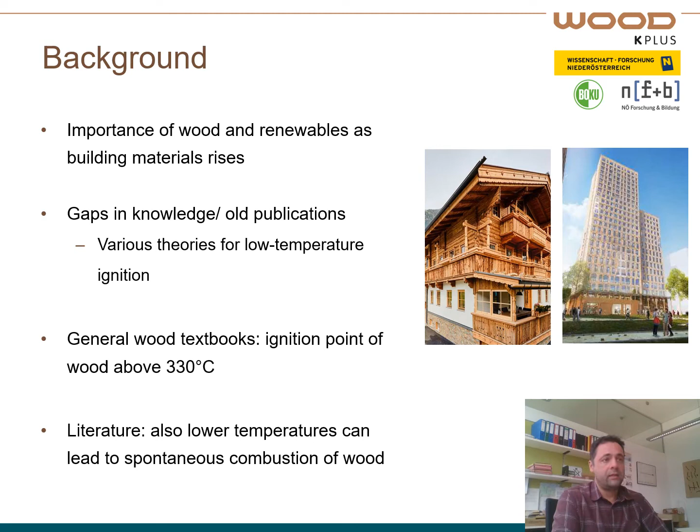There are indications in the literature that significantly lower temperatures can lead to spontaneous combustion of wood. However, the number of studies on this subject is very small, and informative publications have been published decades ago. This has motivated us to take a closer look at this topic.

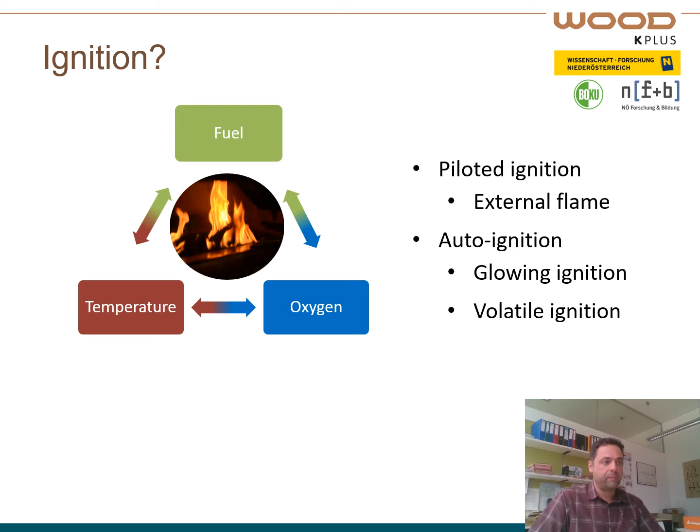The fire triangle illustrates the three elements a fire needs to ignite. In contrast to piloted ignition, where an external flame is needed, the auto-ignition temperature of a substance is the lowest temperature at which it spontaneously ignites in normal atmosphere without an external source of ignition. Regarding wood, we have to distinguish between glowing ignition with lower temperature in comparison to volatile ignition with a hot flame. Our approach is to look at small homogeneous samples and transfer findings to the bigger scale and vice versa.

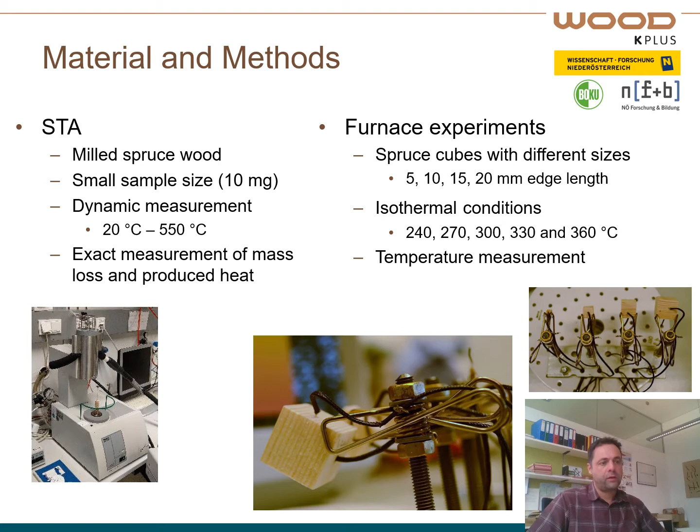So what was done? On the small scale, simultaneous thermal analysis was performed on the three main substances of wood as well as different blends and thin spruce veneer discs. On the bigger scale, we performed furnace experiments. The aim was to see the influence of the size and external temperature on the heating and subsequent combustion of wood. A special rig fitted with thermocouples was built to place 4 cubes of wood at the same time in a preheated furnace under isothermal conditions.

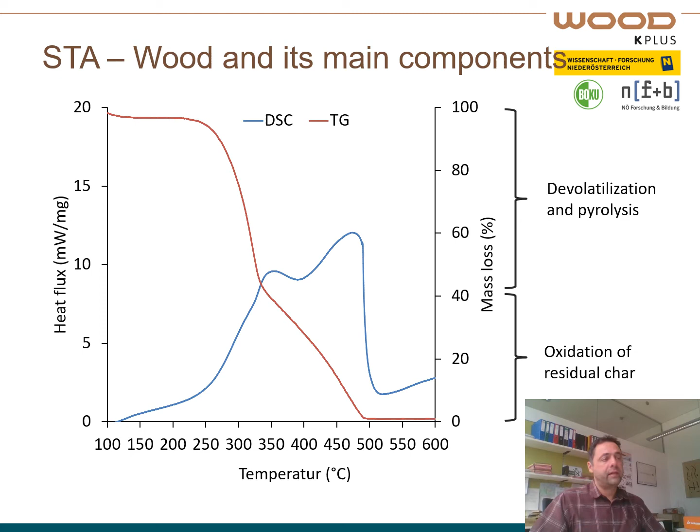An example of a wood thermogram. You can see a two-step disintegration due to the separate destruction of the components. During the first mass loss, we have devolatilization and pyrolysis, followed by the oxidation of leftover charcoal and lignin. We can attribute the mass losses at the different temperatures to the pure substances.

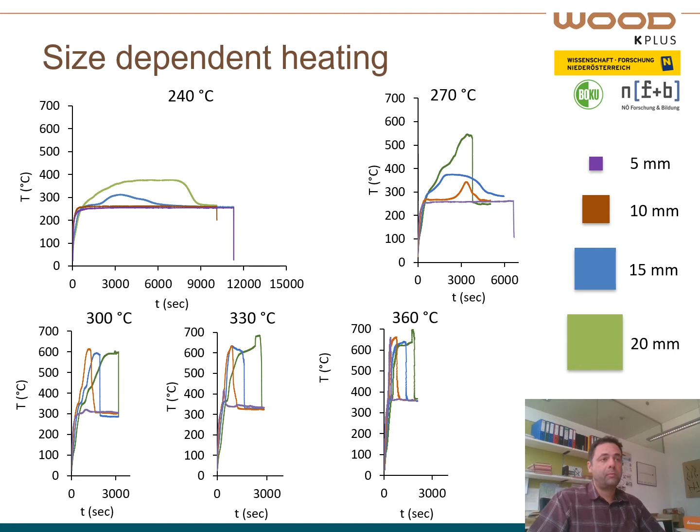Here we see example temperature curves from the furnace experiments. One diagram for each of the 5 isothermal furnace temperatures and the color code for the different sample sizes. At 240 degrees Celsius, none of the cubes ignited, but slight exothermal behavior can be seen in the case of 15 and 20 millimeter cubes. This is also confirmed by the residual charcoal produced at these temperatures, while with other temperatures, most of the samples are burned without any leftovers.

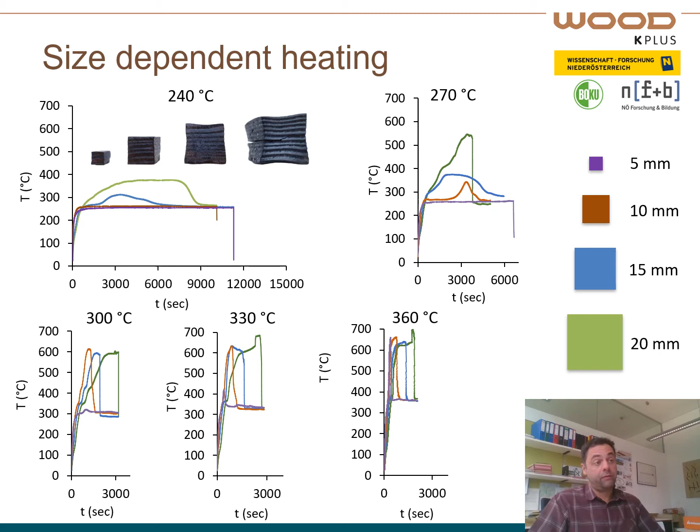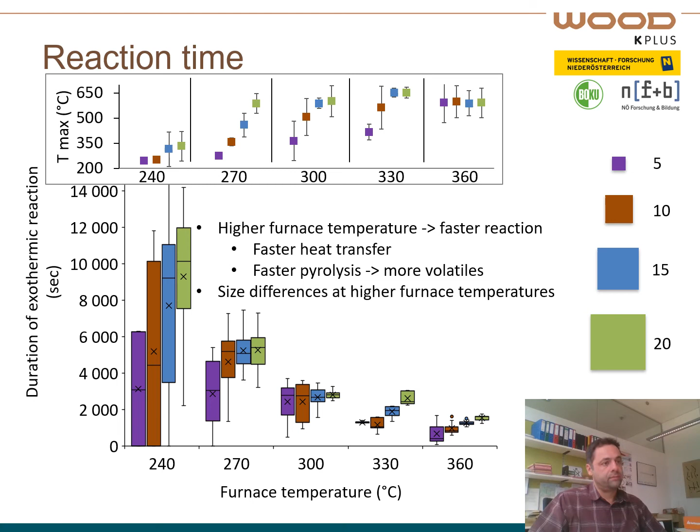We can conclude that auto-ignition is dependent on the size, at least in the analyzed range. We need enough volatiles in short time to ignite or enough charcoal surface for glowing ignition. The comparison of furnace temperature and STA thermograms reveals that 360 degrees Celsius isotherms seem to be related to the pyrolysis of holocellulose. But the research on ignition, of course, is far from over, and we will continue to study this topic, also for the knowledge-based development of fire retardants. We will expand our equipment in the near future and are, of course, looking forward to possible cooperation in this area.